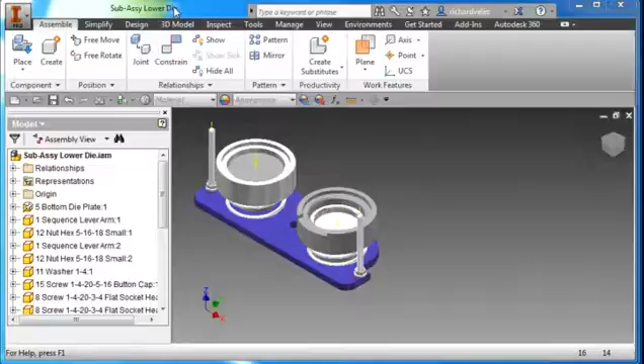Let me create a new assembly and place my first component, item number 5, the bottom die plate.

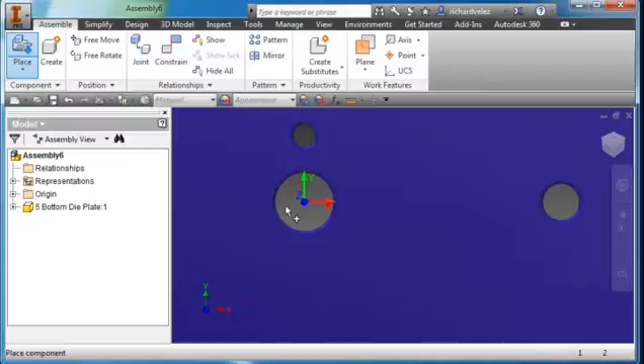Click somewhere on the page, set it down, and hit escape. I'm going to view it by the front. One thing I want to do is place it so the center goes through these three holes.

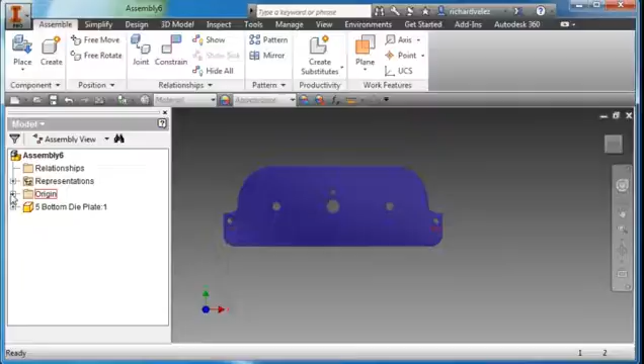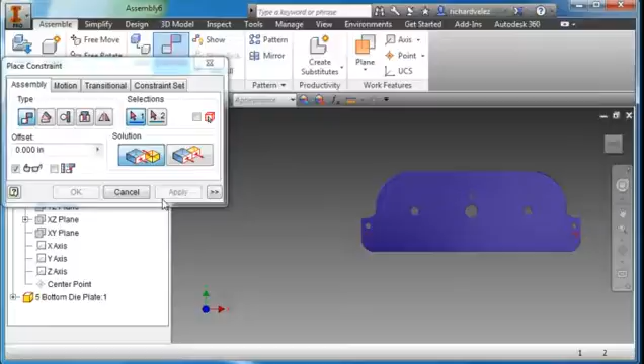Notice that the XZ plane doesn't go through the center of the part, so I'm going to constrain it so that it does. I'm going to create the constraint, point to this center, highlight the XZ, and then point to the center of the hole. Notice that now it does. Hit apply and hit OK, cancel.

I'm going to right click on the icon for the plate and ground it so that it can't move.

I'm going to place my first components, items 1 and 12. Hold the control key, point to item 12, and hit open. I'm going to place two sets of parts, one here and another set over here. Hit escape.

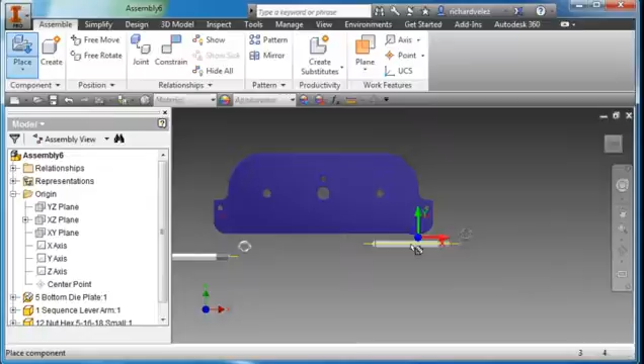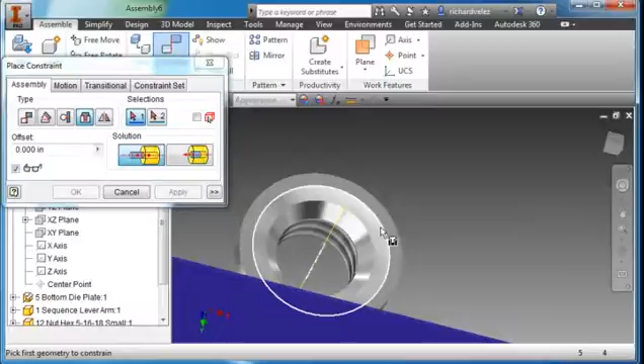Create a constraint, an insert constraint. Zoom in, and I'm going to select this diameter here - make sure you're placing the part on the side opposite the countersink. I'm going to rotate around and select this diameter there. Hit apply. Zoom out.

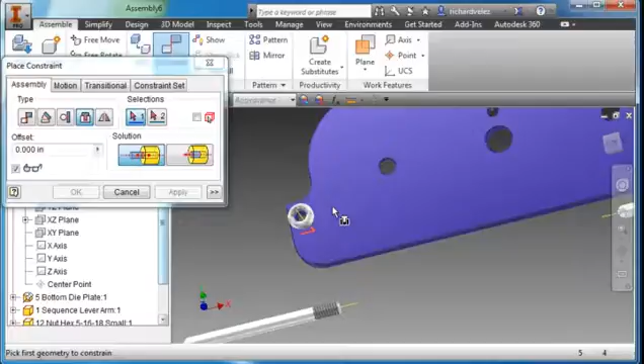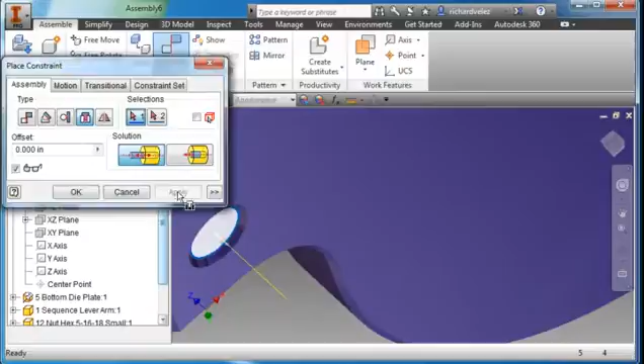Do another insert command. I'm going to select this diameter here and this diameter here. Hit apply. OK. Cancel. Zoom out. And you can place these other sets of parts.

I'm going to place two more parts, items 11 and 15. Hit the control key, hit open. I'm going to set them down right about there. Hit escape.

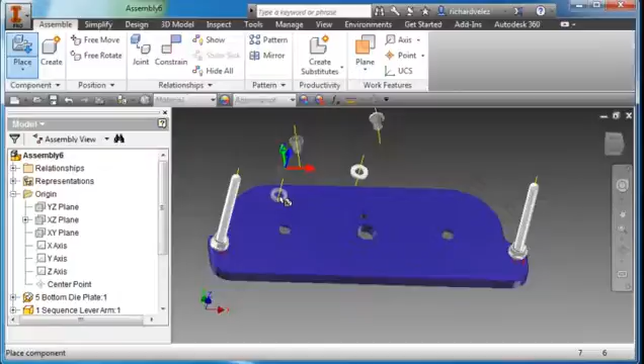Create a constraint, an insert. I'm going to select this diameter there and this diameter here. Hit apply.

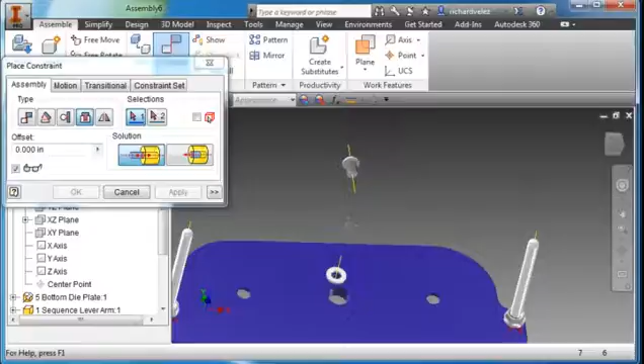Another insert command. Let's select that diameter and this diameter here. Hit apply. Cancel.

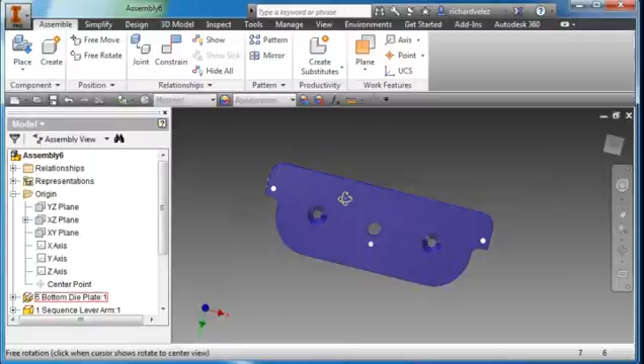Rotate the plate around. Place component number 8, two of those - one here and one here. Hit escape.

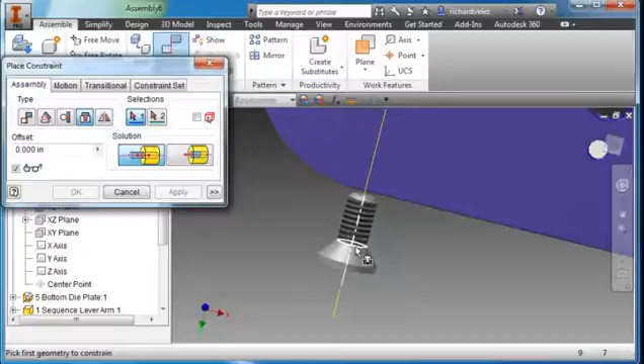Another constraint, insert. I'm going to select this diameter right there and zoom in, and this diameter here. I'm going to flip it around and hit apply and cancel. And I'm going to go ahead and let you place the second component.

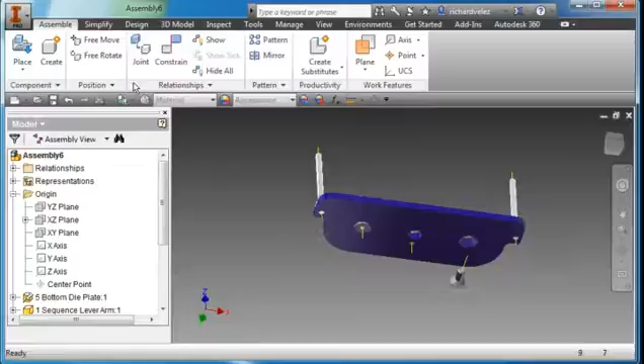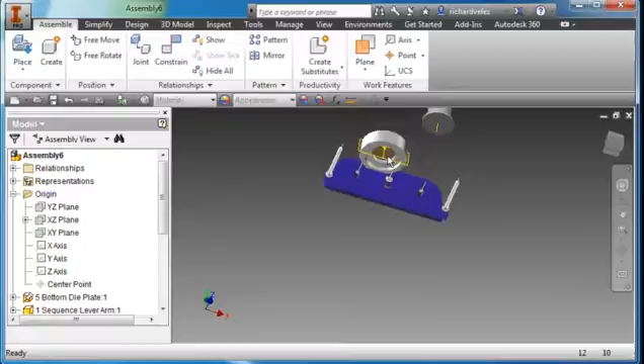I'm going to place the parts on the number 1 side of the die. I'm going to select parts 6, control key, 7 and 18. Hit open. Set them down, hit escape. Zoom out, zoom in, and I'm going to do a constraint.

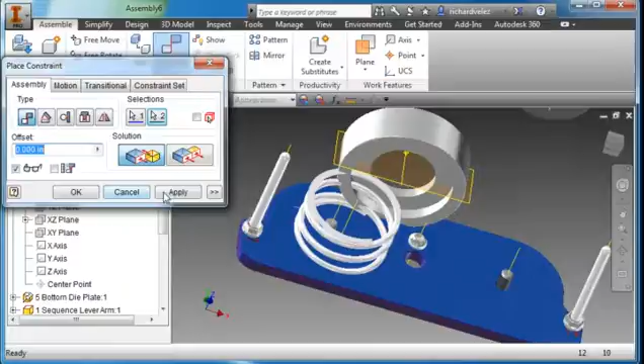This time it's going to be a mate constraint, and I'm going to mate this surface to the top of the plate. Hit apply. If I zoom in, I'm going to select the axis of the spring and mate it with this axis here - another mate command. I'm going to select this axis and mate it with this axis there. Hit apply.

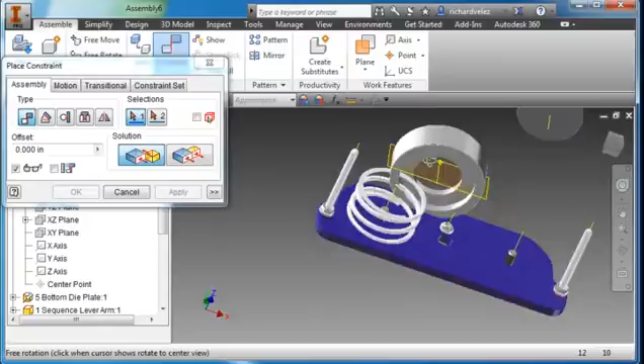Do another mate command. I'm going to mate this surface here with the top of the spring. Hit apply.

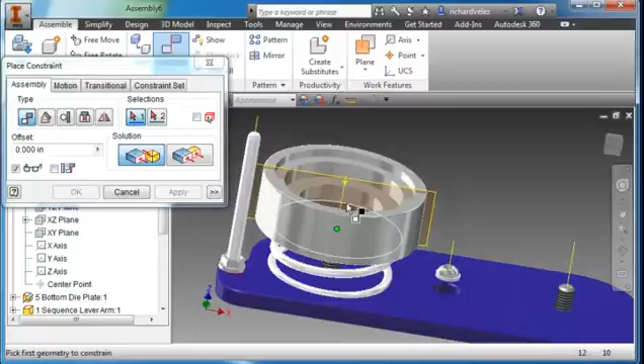I'm going to move this out of the way so you can see a little bit better. I'm going to do another mate command, and mate this axis here with the center of that axis there - it automatically chose it, so the parts are aligned. Hit apply. I've aligned the axis of this part to the axis of the spring.

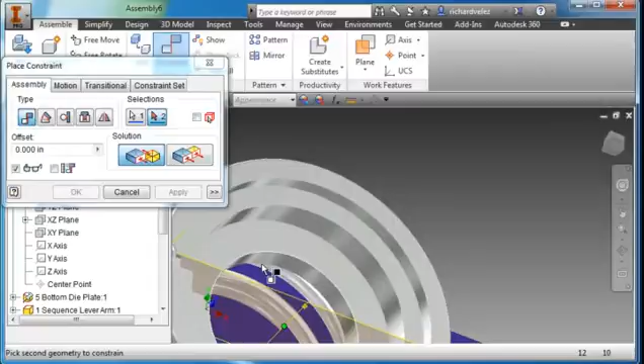One more time, another mate command. Zoom in. I'm going to mate this surface with this surface there. Hit apply. Move the part out of the way.

I'm going to do another mate command, this axis here to this axis again so that the parts are all lined up. Hit apply. Zoom out.

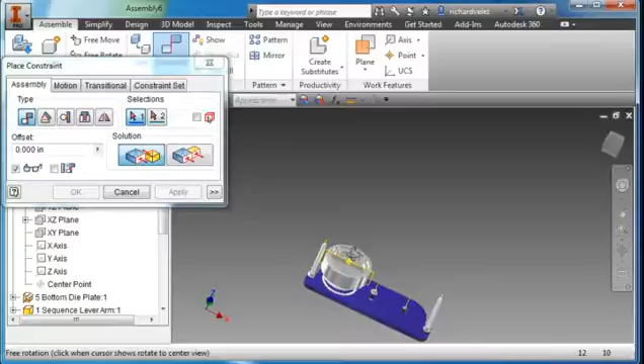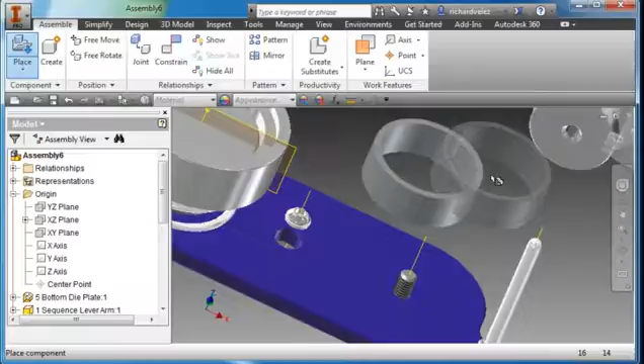Do the same thing here as I did on the other side. I'm going to do a constraint, a mate, this surface here with the top of the plate. Apply. And I'm going to align that axis to the axis of the screw. Hit apply.

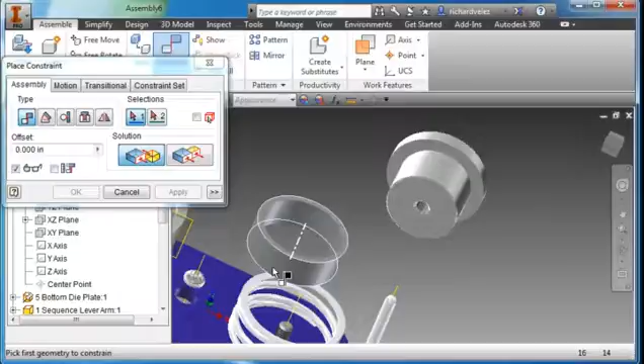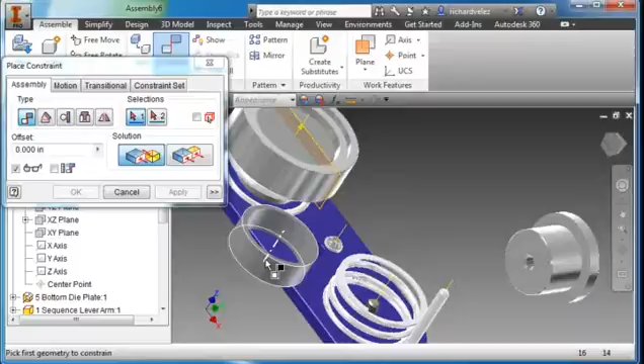Another mate command. I'm going to mate the surface here with the top of the plate. Hit apply. And I'm going to mate the axis of this part with the axis of the screw. Hit apply.

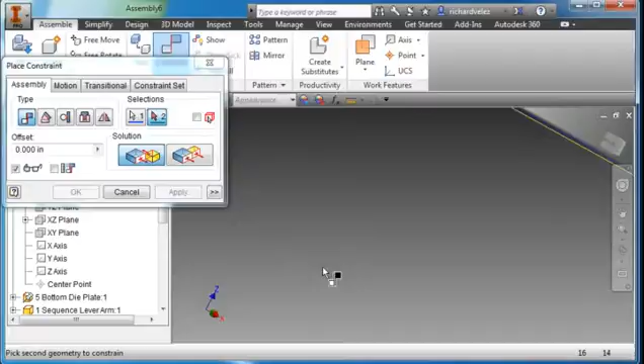Going to mate the surface of that with the top of the spring. Hit apply.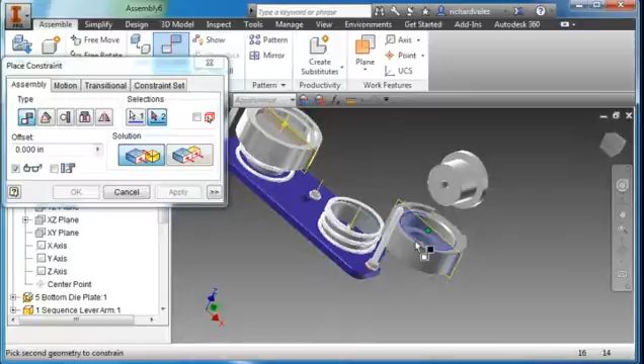Move the part over a little bit. Going to mate the axis of this part with the axis of that part. Did it automatically - I had the part selected. Hit apply.

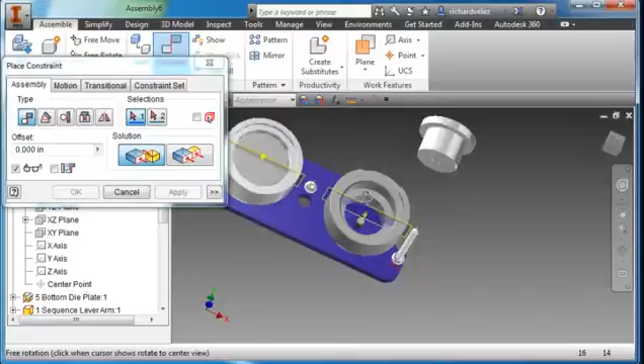I'm going to mate this surface with this surface there. Hit apply. Move this part out of the way a bit.

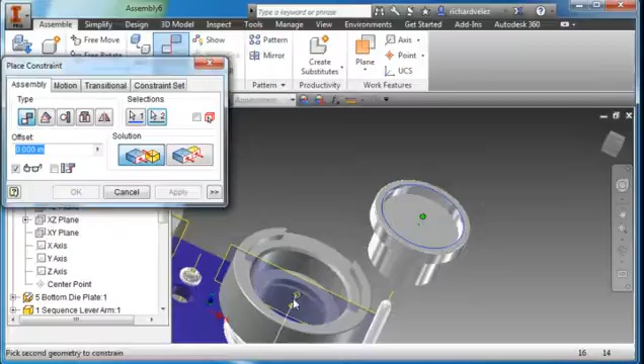One more mate. I'm going to mate this axis with that axis there. Hit apply and cancel.

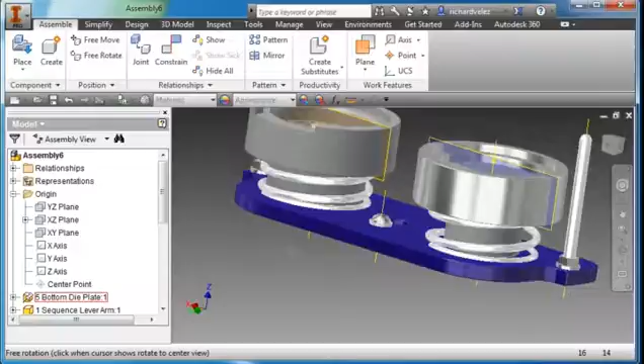Now one last thing I want to notice is these parts, even though they're constrained, they can still rotate, and I want them to be aligned like this.

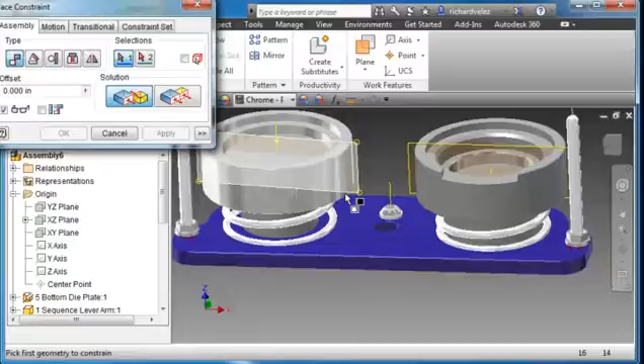So what I'm going to do is add another constraint, a mate constraint, and zoom in, make sure you select this work plane with the, zoom out, the XZ plane. Hit apply, and now this part cannot rotate - it's fully constrained.

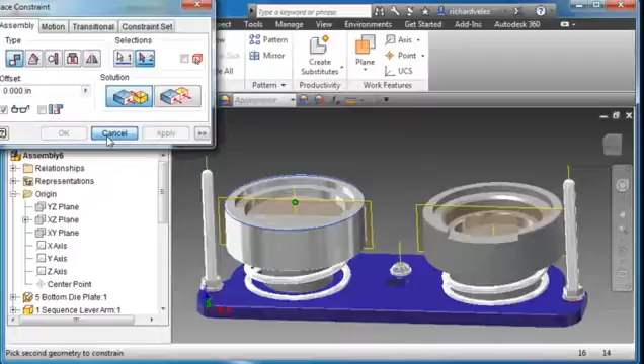And I'm going to do the same over here. I'm going to add another constraint, zoom in, make sure you pick this work plane and the XZ plane. Hit apply, and now you notice that this part can't rotate now. Cancel.

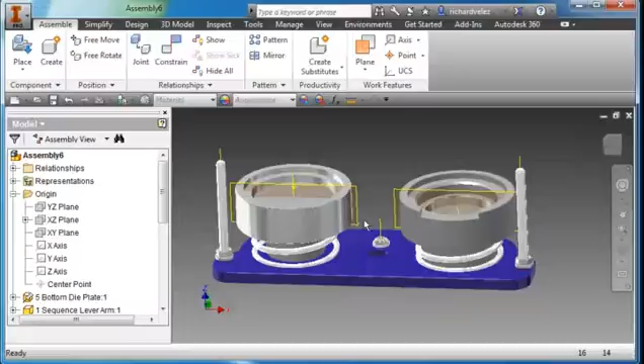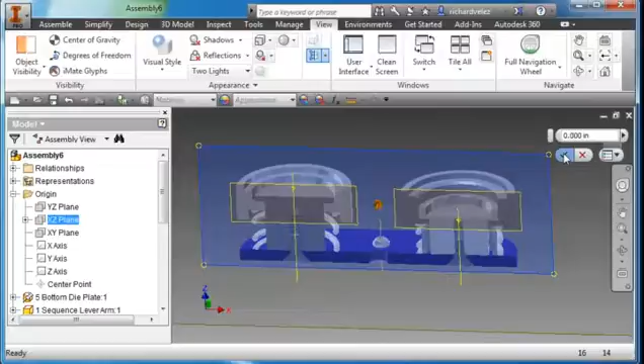Now as the last step, I'd like to do a cross-section and check my work. Go to View - my window is compressed so yours may look different, but look for this cross-section option, choose half section, and choose the same plane, the XZ plane. Hit the check. Look at the part normal, base normal, and check that your parts are lined up on both sides.

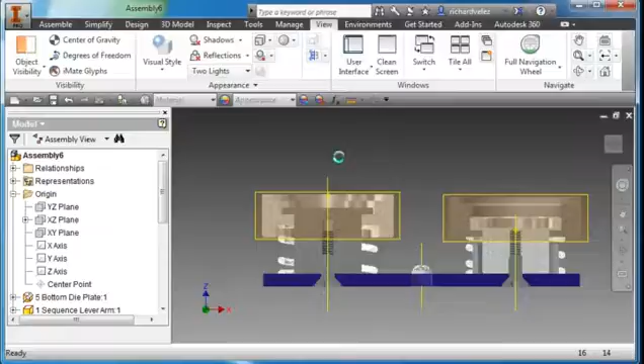Come here to cross section and turn on section view. Save your part as subassembly lower die.